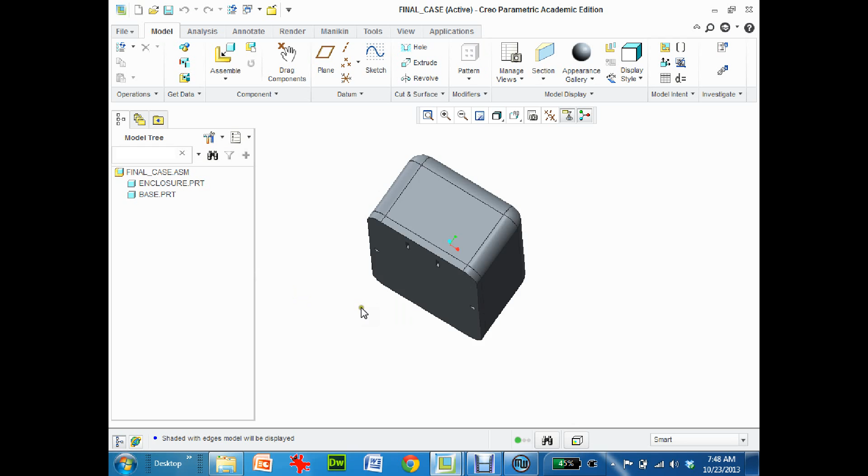Hello, part 5 of the tutorial on how to make your case for your USB power supply. So this is my finished product. This is what it's going to look like.

Now what I need to do is get it from here to the 3D printer. To do that I need to save it in a file format that the 3D printer and the 3D printer software recognizes. So I'm going to start with the bottom part. I'll click on it once so it's highlighted in green, right mouse click, go open. Okay, so now I'm back to my base part.

All I'm going to do is save it as a different format. So I'll go File, Save As, and you can see my two original parts. Down here where it says Type, it says a part file. I'm going to scroll down and there's all these different file types. There's one called stereolithography, or an STL file. This is the format the 3D printer needs. So I just click on that. I can still call it base.

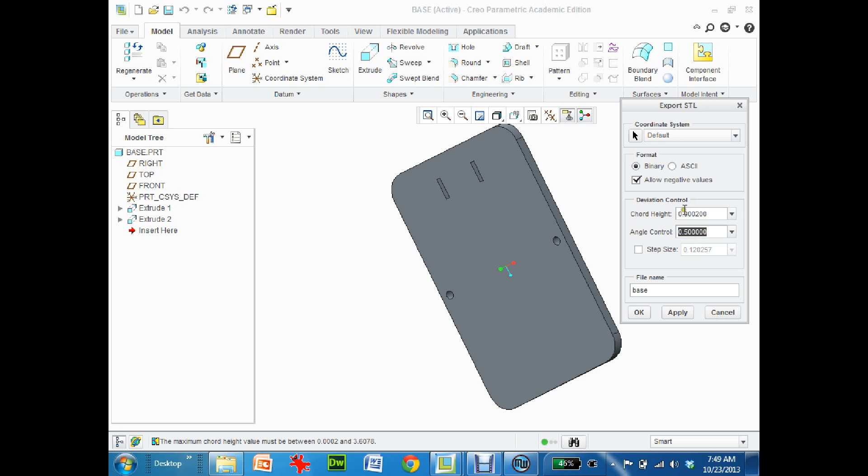Click OK. Over here the only thing you have to change is where it says chord height, which is highlighted — just put 0. As soon as I click somewhere else, it automatically defaults to whatever the program feels is necessary. I click Apply, and that gives it a bunch of curved edges and things like that. When you zoom into this, it's a nice smooth curve. I just hit Apply, then OK, and it's saved.

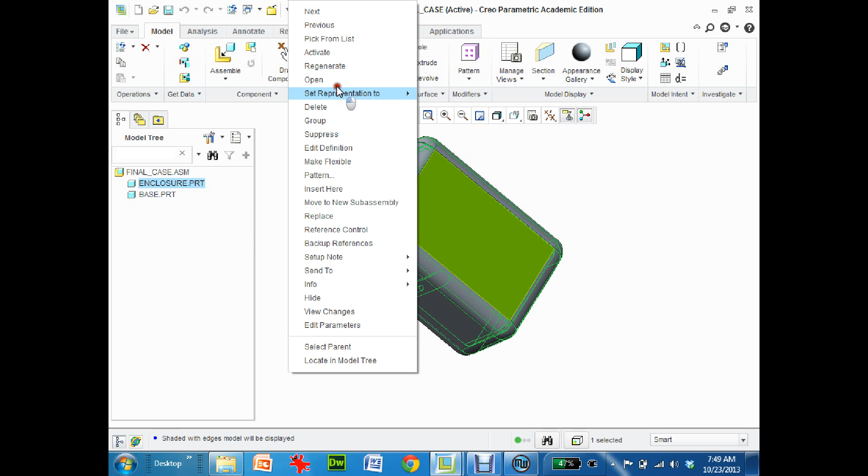So now I'm going to close off this one and do the same to the top part. I'll click on the top part, right mouse click and hold, go to Open. Here's the part again. Go File, Save As. Scroll down, type is stereolithography — whoops, I didn't do the right format there, it's stereolithography. You'll see now that there's the base part, and now it's the enclosure.

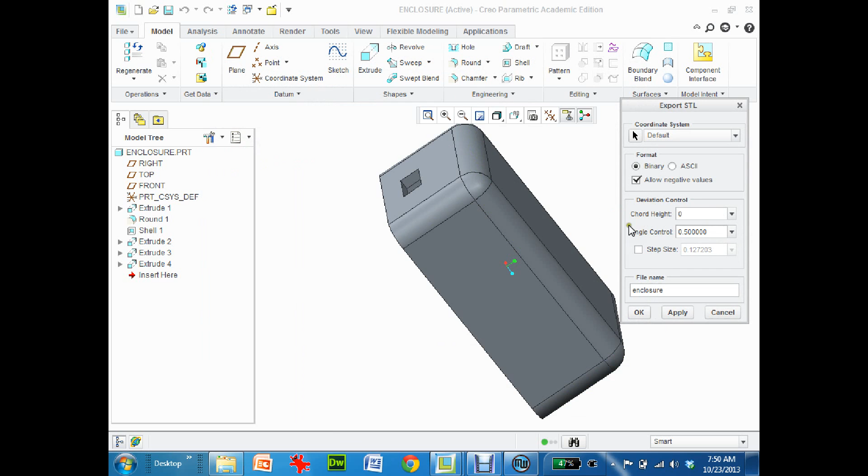Set this to 0, click Apply, then OK. So it's saved, and I can close it off. So I've got my two files saved for the MakerWare software, the 3D printer software. I'm going to leave this program and call up the MakerWare software.

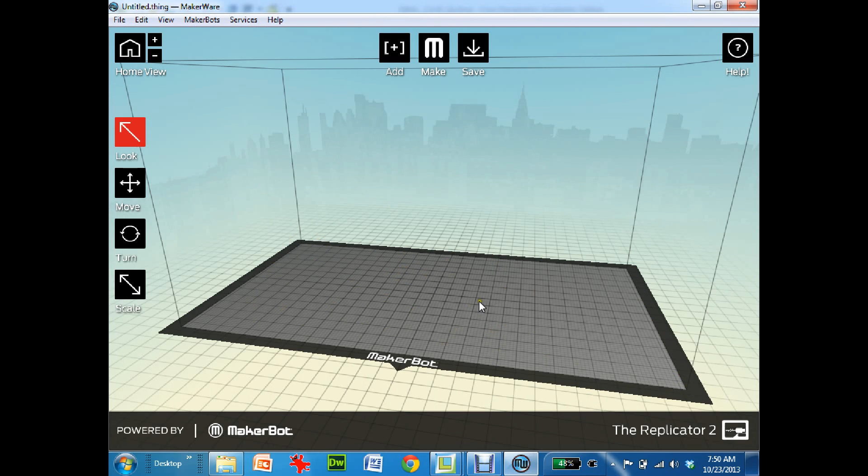So this now is the MakerWare, and this is basically the bed for the 3D printer. What I'm going to do here is just open up the file and place it on the bed. I'll click on Add. In this case I'm going to start with the base because we want to make sure the base is right. So I double click the base.

It's going to ask you to put the object on the platform — move to platform. For scaling up the object, you say rescale object. What that does is scale it automatically from the smaller size, which is in inches, up to millimeters, so it actually fits properly. If I'm not sure that's the right size, I can click on it, then click Scale.

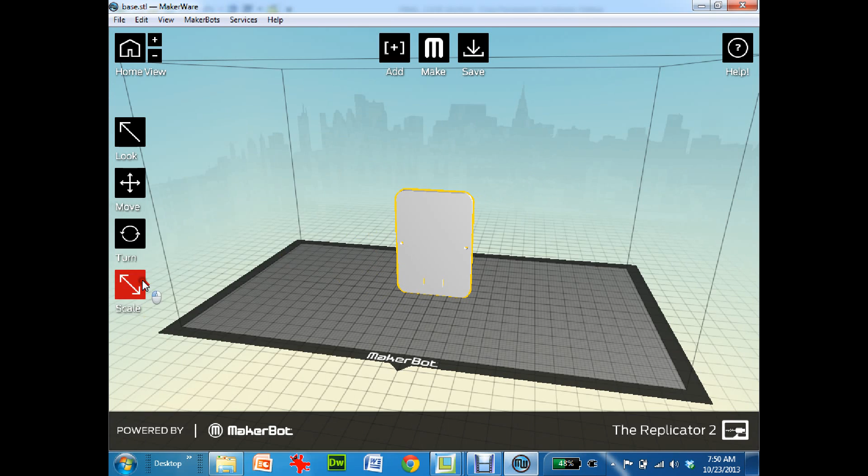You have to do a bit of math here because everything works in millimeters. It's 2 inches on the X, okay, really is. 1 inch is 25.4 millimeters, so 50.8 is 2 inches. So I know I've got the size right.

Now I need to turn this and fit it on the table flat. So I'm going to click on Turn, and sometimes you have to click 90 degrees, right? That turns it 90 degrees that way. If I want to rotate it this way, I can go 90 degrees so I can see it that way.

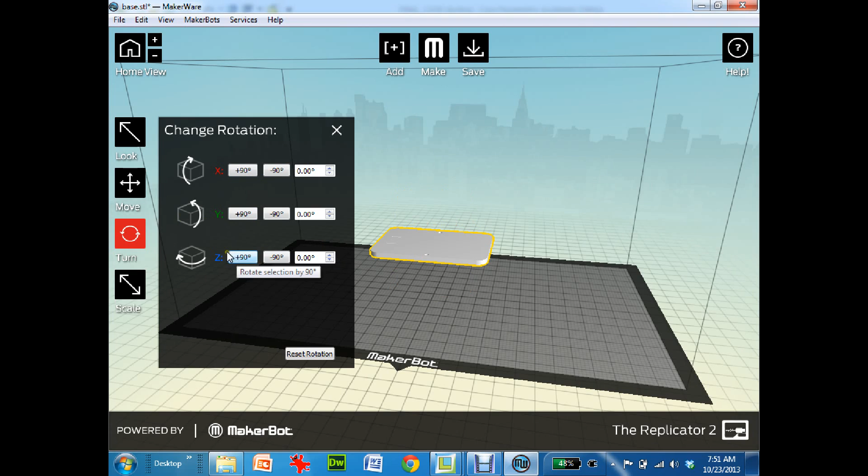And I'm going to go back to Move, and move it on the platform. It's very important that it's on the platform, otherwise the 3D printer tries to print in space and it doesn't work. Last, I'm going to go to Look.

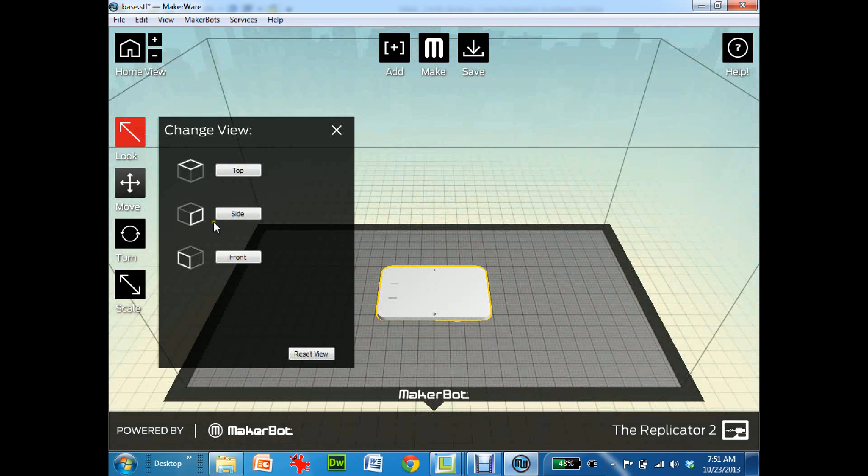I'm going to close this off now, and I'll just hold on to the button. You can see I can scroll around and look at it to make sure it's in position — and in position can be anywhere on the bed basically. The other thing I can do is look from the side and use the scroll button, making sure it's flat across and not on an angle.

Because if it's up on an angle like this — let me show you — if I actually have it on a bit of an angle like that, and I go to look from the front, you'll see that it's going into the bed. That's not good, right?

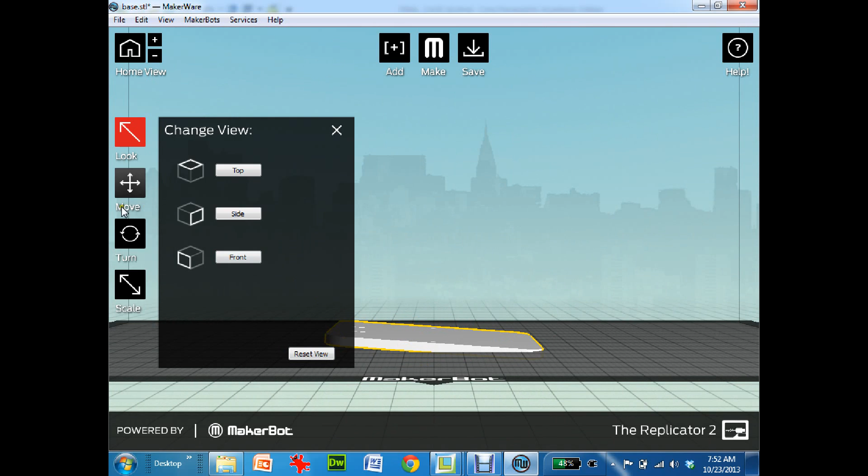So I'm going to go back to Turn, and take this one back to 0 to make sure it's flat. Everything looks good, so I'll close it off and I'm ready to make it. I'm going to take this now - oops, let me go back to Look. There you go, and I'm just going to do it on that angle. It doesn't matter, so I'm going to go to Make.

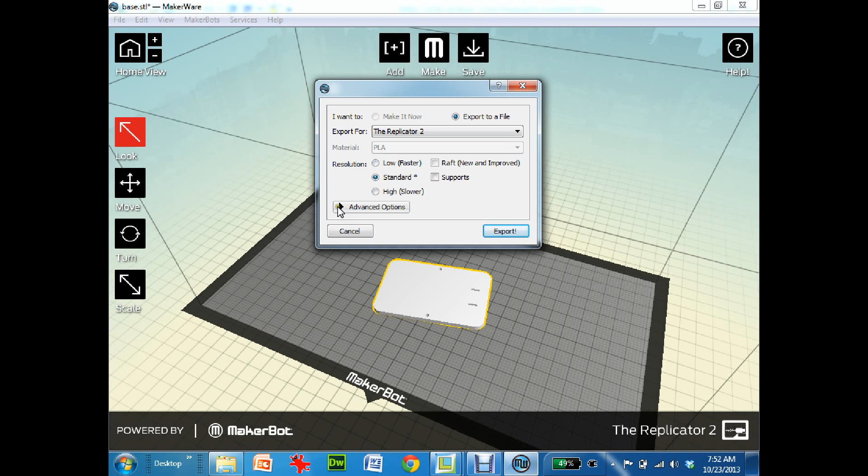In this case, I'm going to export for Replicator 2. For resolution, I'm going to go with standard resolution because I'm going to explain this. If yours is showing the advanced options, you click on it to collapse it down. Now I'm going to explain the quality settings here.

Infill is how much material is inside, so I'm going to suggest you do it at 40%. The number of shells we'll leave at 3, and the layer height we'll put at 0.2. That means every time this thing does a pass, it puts down 0.2 of a millimeter - so to get to 1 millimeter thick, it takes 5 passes.

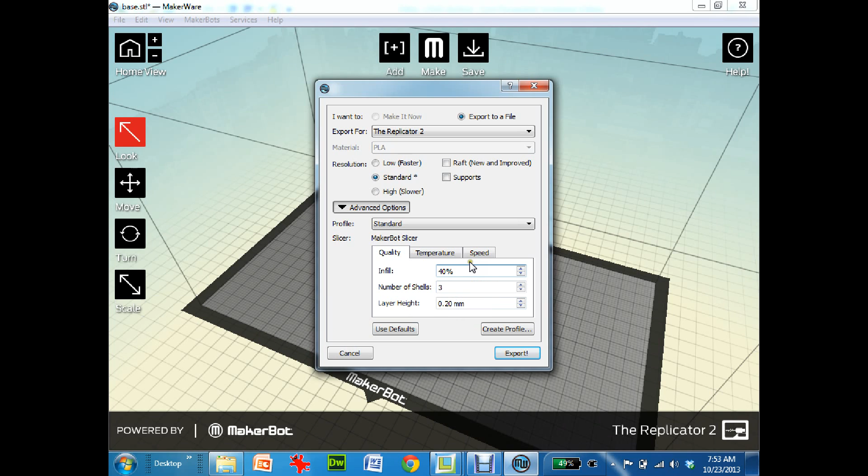The number of shells is how many times it goes around the outside to make it structurally strong. Then the infill is how much fills in between the shells, between each edge. That's a pretty good number, so I'm going to click on Export.

Once I've clicked Export, I'm going to export it to a thumb drive, which you'll get from the 3D printer - that's the only time you can get it, because you're going to put it on the machine right away. I'm putting the thumb drive into the computer now, and you'll hear a little blink, and under My Computer there's my removable disk. I'll click on it - there's all these other things that have been put on recently, and you're just going to call yours your name. In this case, it's Klassen-base, so I know it's your part and it's the base part, and we'll hit save.

Now it's going to slice, which means it's dissecting this and turning it into information the 3D printer reads. It goes through slicing, verifying, and once that's done it's complete, and then I can demo the 3D printer.

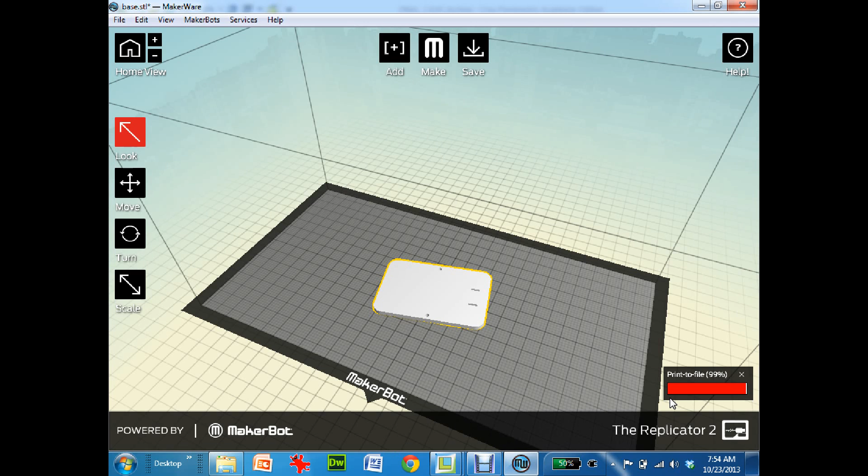The last thing is that you'll obviously have to go back and put in your top part - it follows the same process. I'm going to do a quick talk on that. That's now done, and now I can add a second part to it.

So I just go to Add and take my enclosure. Move to platform, rescale object - there's my enclosure. I'm going to click on it this time and turn it. Click on Turn, I'll turn it 90 degrees.

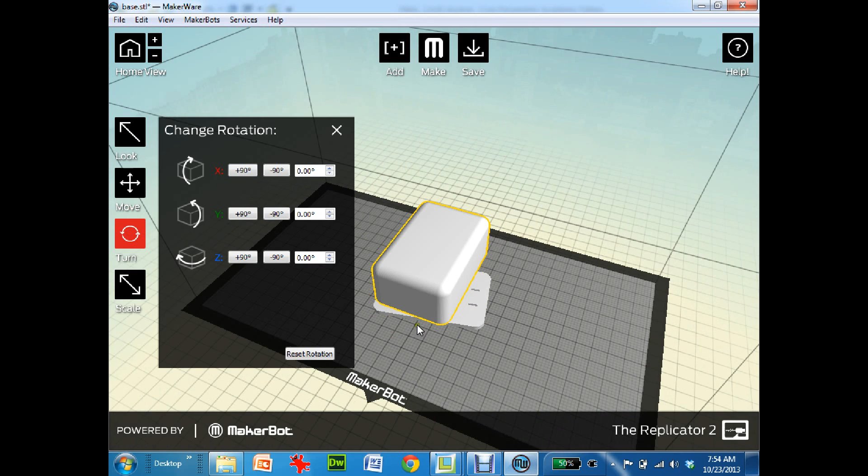Now here's an interesting thing - if I leave it like this, it's going to build up from the edges and try to build across the top, and that's in open space. It's not going to build very well, it's going to droop. So what I want to do is make sure it's actually this side up.

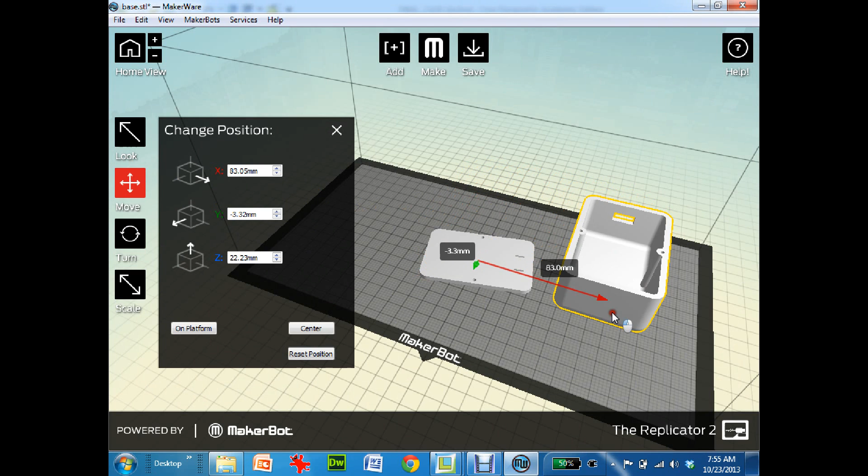Then I'm just going to move it over to a different space. If I go back to Look, you'll see - whoops, hang on, there we go - you can see it's up in the air, so I have to go back to Move and put it on platform. Just as a side note here, I'm going to close it now.

Now when I look at this, when it builds, it'll build the bottom first and then slowly build up the top. This part here will have to draw in space, but since it's a short distance, the machine will go straight across without it drooping down much.

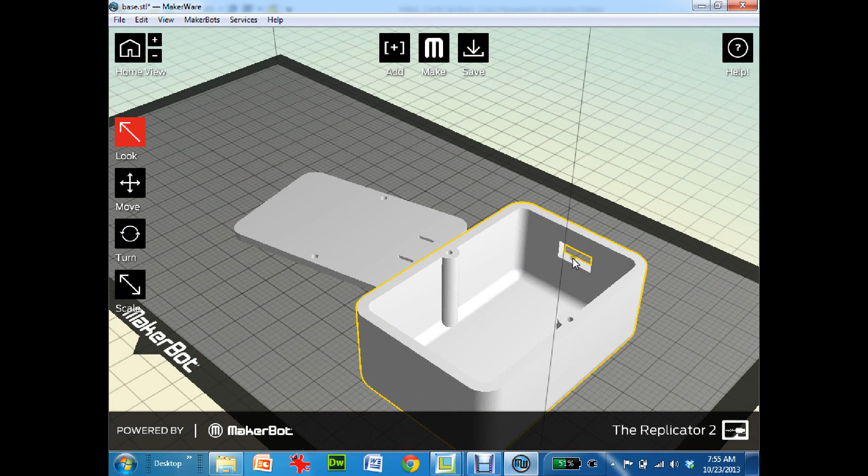But you could, in theory, build both parts at the same time on there, and you might want to do that so it's all done in one shot and over with. Sometimes building only one is better because that way you can see if it works the first time around or not. So I'm going to stop there - that's the conclusion, and the next part of the tutorial would obviously be watching how to use the 3D printer.